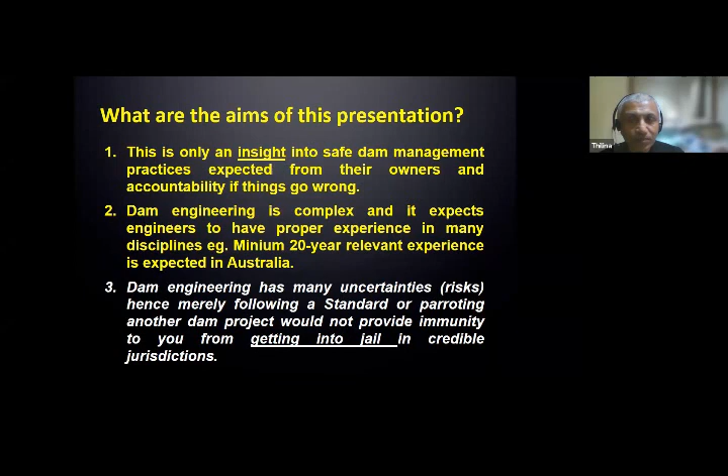Next one, please. Next slide, please. Now, I thought I'll put this one. Of course, for somebody owning a dam, life can be very difficult. So this slide I got from a small... Next one, please. Don't change it. Please go back to the first one. Yeah, please stay. Please stay until I say next. Otherwise, it gets complicated.

So, as he said, no friends after something goes wrong. As you know, trial by the media and also nowadays YouTubers. Even YouTubers asked me to give a voice cut when I was in Sri Lanka. Then independent inquiries: here, we didn't have an incident with any fatalities, but the dam was shown to be deficient, and there was a royal commission and the engineers were prosecuted. And when something goes wrong, insurers always try to find some deficiency in what you promised and how you managed the dam. I'm involved with a lot of insurers and owners. That's what the insurer is looking for, so that they don't have to pay the claim.

Then class action by those affected. In Australia, there are lawyers who do free class actions, saying if I win the case for you, you give me a cut. So if you've got 5,000 people, say $1,000 a person, if they win, that's 5 million. So that's how it works now. And also, everybody will say you should have known better. We are all smart in hindsight.

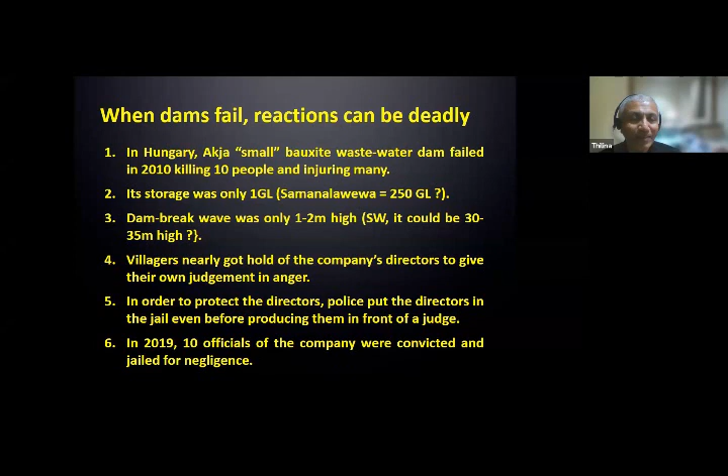As I said, a dam is not a lovely pet - it's an expensive beast, so you need to know what you own. It's like probably owning an elephant - it's expensive, and if it breaks away it can cause a lot of harm. So what I'm going to do is try the legal framework, because here it is very clear who is responsible. There are no ifs and buts.

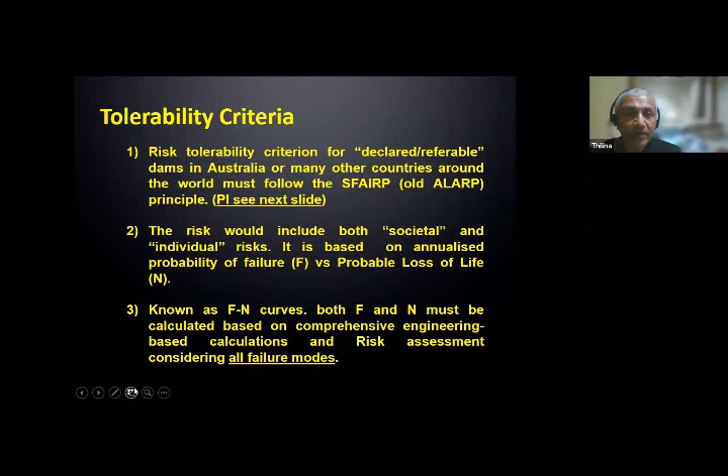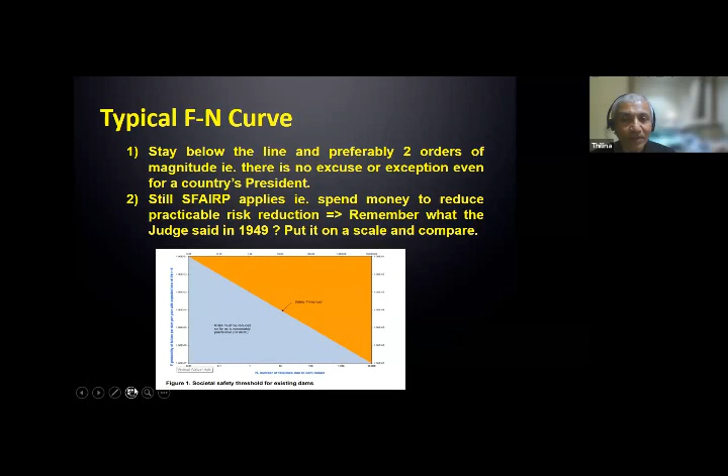So they had to do the numbers - do I save 10 people by spending another 100 million rupees? So I'm just below the line, am I safe? No, you are not safe. It has to be put on the scale and measured. I am not doing it, the judge will do it. Still, SFAIRP applies, you spend money to reduce the risk. Just because you are below the line doesn't mean you are off the hook.

Now I just showed a successful application of ALARP principles here in the inset. Every dam project upgrade, however small the dam is, that has to be done. So Canning Dam upgrade in Western Australia had one of the largest ground anchors in the world, each cable carrying...

2,500 ton load. I did the presentation about this 9 months ago. That's the first in Australia to have a comprehensive risk assessment to justify remedial works, when nearly 100,000 people are exposed should it fail. There's a paper I co-authored in 2001. So what you're looking at on the screen, on your right at the top, is the dam is unsafe above that line. So we did remedial works to come below the line.

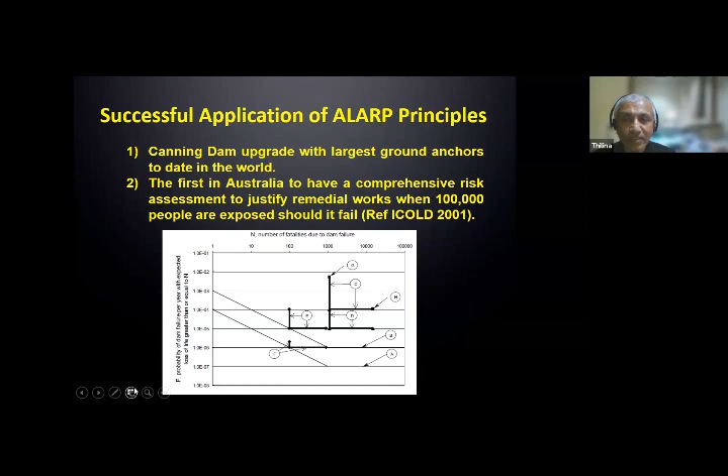And again, this is about 30 years old, this curve has been revised a few times. So it's not that we just put 10 cables based on some sliding factor of safety, which can be done by a fifth grade student from a good school - that's not dam engineering. You need to look at all the failure modes and where your risk profile is.

So any dam needs to have a consequence hazard category. I don't know about the Sri Lankan context, I doubt they have it - maybe somebody told them it's extreme, so they adapted that. In simple terms, a dam is a hazard, so we need to know what are the consequences should it fail. The main criteria is how many people live downstream - not how much hydropower you make, not how much profit margin you make, not whether you're owned by the government or a government utility supported by your friends.

The people who would be affected most are the people living there - people need to live first before they eat. And number two, please don't assume that your dam will not fail because it has a higher factor of safety. Any structure can fail - it's a probability of failure, because in dam engineering there are a lot of unidentified deficiencies. For many dams, we find deficiency in the dam or foundation when it leaks after it is impounded. So to reduce that risk, you have to do more geotech investigation or grouting, and have redundancy.

If it fails, what do we do? That's what many dams have filters for - if the clay core fractures, the filter is going to stop it. There are a lot of dams without filters constructed 100 years ago, still there - probably Giritale and other dams don't have filters. But nowadays you need more risk aversion. That's why any new dam more than 6 meters high is mandatory here to have a filter.

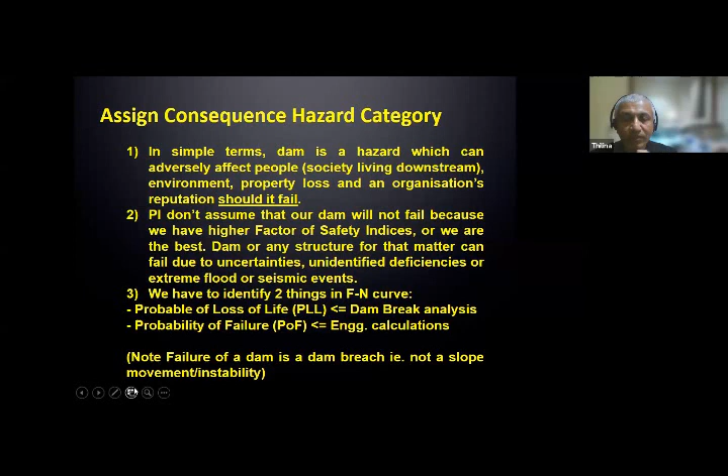Consequence hazard categories. Basically, irrespective of the factor of safety or how thick your concrete, how flat your slopes are, you have to have a consequence assessment. Should it fail?

Then, depending on the determined consequence, in most credible jurisdictions we have categorization from low to extreme. Low means it doesn't have any population at risk should it fail. But there are business and environmental factors too; the main criteria is population at risk or potential loss of life.

As I said, the old rule was a 15 meter high dam is a large dam, high grade. Well, those days are gone now. Even a 6 meter high dam can be an extreme hazard dam, while a 50 meter one is not.

I'm involved with some light rail projects in Sydney. A 6 meter high dam became an extreme hazard dam because should it fail, 94 people could lose their lives. But if you've got a 50 meter high dam in the bush somewhere, probably hardly anybody is affected, it's a farm dam. So it's a low hazard category.

Number four, risk is probability of failure times consequences. If there's a larger population downstream and probability of failure is low, the risk is higher. Other way around: few people downstream but higher probability of failure, it still becomes a high risk dam.

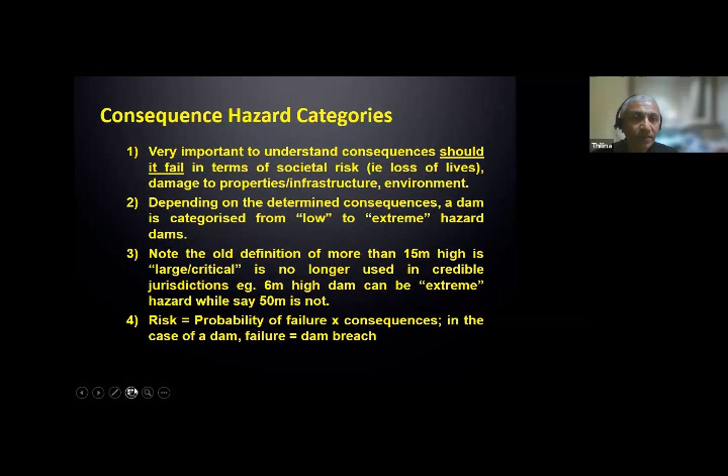ANCOLD was, as I said, first to include this principle, and it's in most of the standards now, and most countries follow that.

Then there are declared dams in the legal framework, as I said before. This means the government would like to know how declared dams are managed, with regular audits undertaken by the regulator. So the owner has to produce reports, and they will be independently audited by the regulator. If the owner doesn't do it, the regulator will do it with government money and pass the bill to the owner. Next one, please.

Consequence hazard. This is how we calculate population at risk. That means all people who would be directly exposed to the flood waters, assuming they took no action to evacuate. They basically stay put, they don't run away. Basically, population at risk of getting wet feet. Should the dam fail, water goes somewhere, and if they get wet feet, they are counted in the population at risk.

The definition of wet feet, or inundated, varies from country to country. In Australia we use 0.3 meters; anything greater than that, people there are counted under PAR. New Zealand uses 0.15, probably they're more scared of water. And the Philippines uses 0.5; when I asked Filipinos, they said we are used to water.

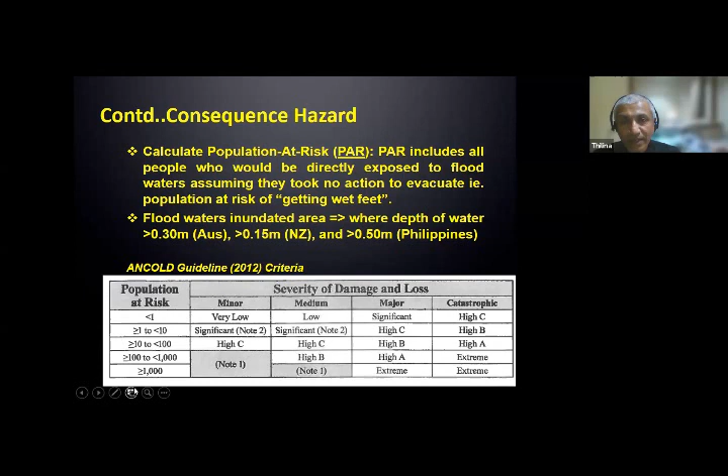Now, as I said, dam break - how do you determine population at risk? You do a dam break analysis, and it has to be done for a sunny day scenario: all sunny, and suddenly the dam breaks. Kantale, as the person who introduced it, said it fails on a sunny day.

So people don't expect it on a rainy day, at least they'll stay inside. On a sunny day, bingo, it goes. And also flood failures - during a flood, you can get overtopping or high water levels can break it.

You can also use screening methods or software such as BOSS DAMBRK, Mike 21, TUFLOW, HECRAS. There's software there to do dam break analysis.

Dam breach dimension - how much, what's the opening on the dam - has to be done by a dam or geotechnical engineer, not somebody in Croatia. I saw some report in Sri Lanka from a Croatian consultant. It's nothing against Croatia, but you have to base it on your own local calculations. If it's silty sand, it erodes within minutes.

DBA gives dam break hydrographs along the valley, and depth, velocity, and the travel time. Travel time is important at night. We don't know until water is probably coming to our doorsteps. And location, and normally, as I said, location with dam break wave travel. If a dam fails, how it comes to your doorstep, greater than 3 hours. They assume people will evacuate themselves, not counted.

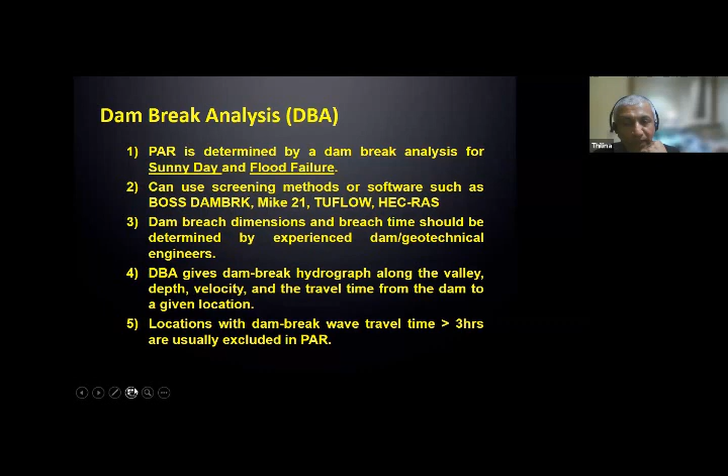Next one, please. Next one.

Now, dam break analysis. As I said, sunny day, SDC. This simulates a sudden breach of a dam in a situation such as a seismic event, internal erosion, known as piping, except Kantale is a piping where suddenly the dam breached through a hole initially formed on downstream, and probably foundation failure due to solution cavities. For example, like Samanalawewa, they all come under sunny day. It doesn't have to rain for that to breach. That's what we call sunny day.

Then flood failure mostly happens with spillways either inadequate hydraulically or structurally, and also the dam will be overtopped. Oroville Dam in USA, I think about 4 years ago, they had to evacuate 300,000 people because the spillway slab lifted off. So those are called flood-induced failure. Now, when it comes to flood, we use incremental, with and without dam break, because without dam break, in natural floods people have already gone to higher ground. So we take the difference.

So this assessment is very complex with many implications to the owner. Low to extreme, high A to extreme. For extreme, the hydrograph is the probable maximum flood, nothing higher than probable maximum flood. If it is high B in that table, probably, I think, a 100,000-year flood. If it is low, they don't care about the flood. It can get washed away if they want, daily or weekly.

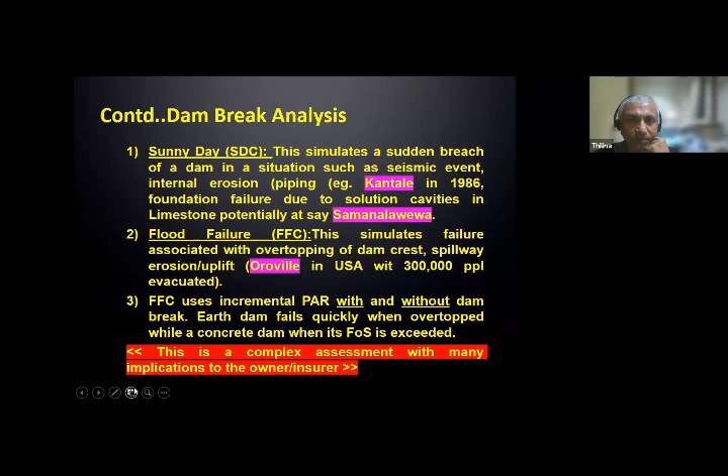Okay. Now I put this just for a project I was involved in, in the Philippines, 110 meters high, near Manila. It's an embankment dam with a height of, I think, 90 meters, and a storage capacity of 150 gigaliters. It's reasonably big. Many lives would be exposed, I didn't say lost, exposed when it fails, probably inundating suburbs around Greater Metro Manila. The failure scenario shown in the next few slides is piping. Sunny day, it fails. And the breach dimensions, which we calculated, are 65 meters wide at the bottom with a 1:1 slope going up. So it's a big opening.

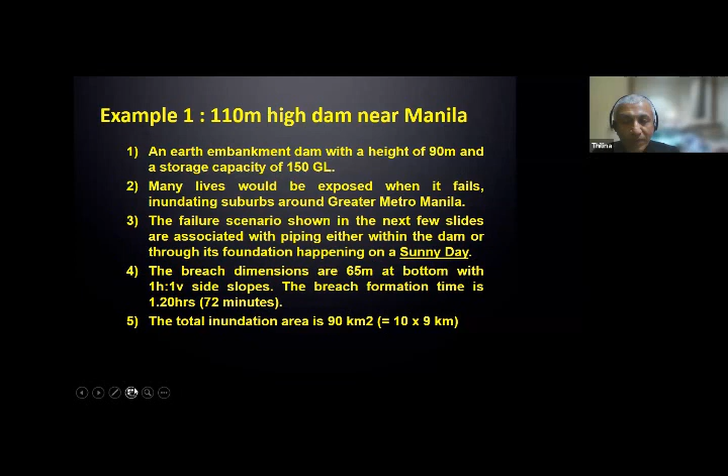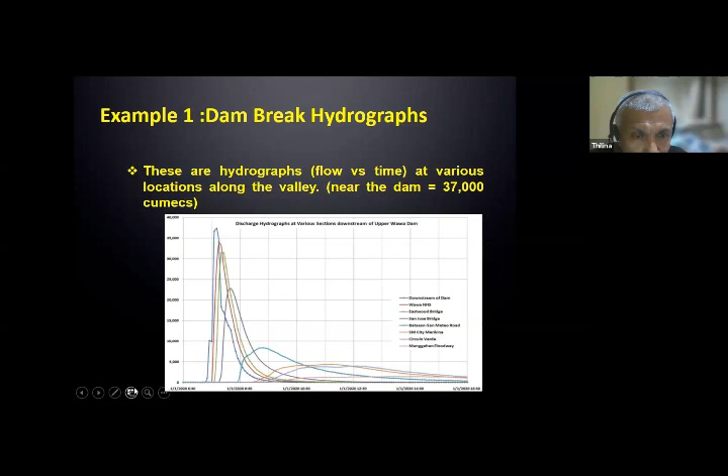Next one, please. I just want to show the consequence. Now this is a hydrograph, flow versus time at different locations. You can see close to the dam, I think this is about 1 kilometer downstream of the dam, the peak flow is 30,000 cumecs, 37,000 cumecs, which is huge. I think the inflow is 1,000 cumecs. This one going out is 30,000 cumecs. So 30,000 is huge. As it travels down, the peak reduces, but the duration increases, because all the water in the dam has to go through the floodplain until it enters the sea or the river.

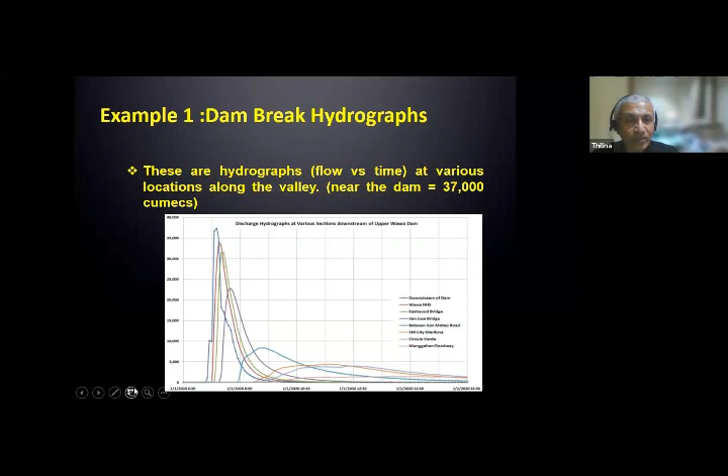Next one, please. This is in the Philippines, not in Western countries or anything. So the Philippines probably do better than us, a country that was not doing worse than us 50 years ago. So they are catching up. Probably Sri Lanka is falling behind.

Dam break inundation. This is a shot I just got from the report. So maximum depth is approximately 30 meters. 30 meters is about, I think, a 12-story building.

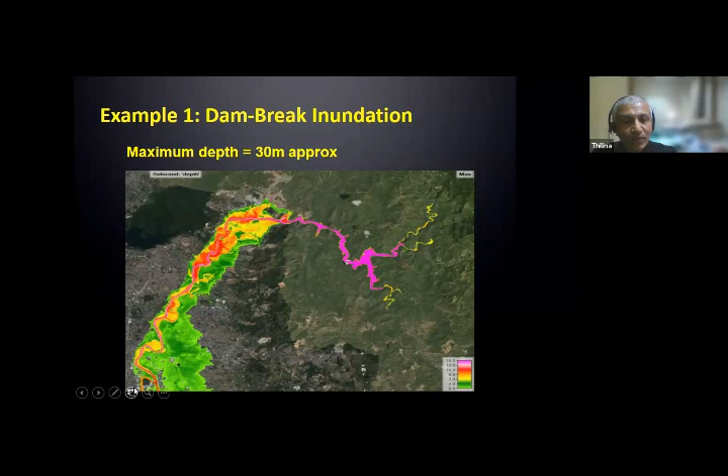Next one, please. Next slide.

Next one, please. Next one. Next slide.

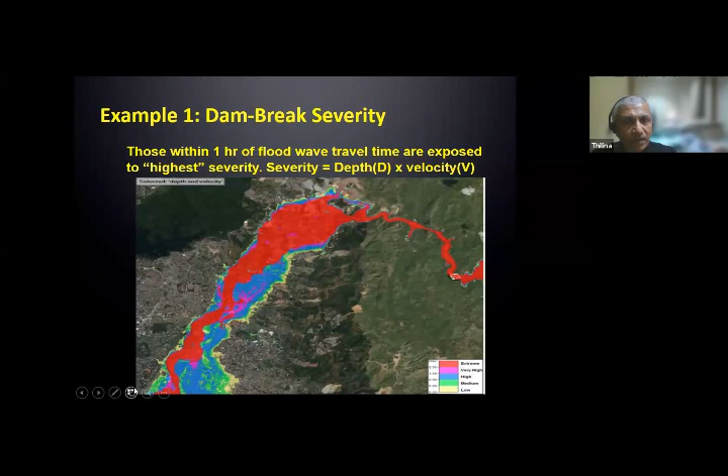Now, once we do the population at risk, that means they took no action to evacuate themselves. We know, say, 30,000 people on the floodplain. Then we had to look how many lives can be lost, because some people can run away, some people climb onto the trees. So it's human behavior. There are few methods in the world. Most popular, Graham 1999, is coming from the United States Bureau of Reclamation. That's what is used in most credible jurisdictions to estimate population at risk to probable loss of life.

As you can see, bottom one, DV greater than 15. That slide I showed, fatality rate is 0.75. So 100 people are in the PAR, 75 will die. So that's how probable loss of life is calculated. That is needed for the ALARP principles. So in each zone, probable loss of life is fatality rate times the PAR, and then sum them all up to get the N value on the risk basis. So if it fails on a sunny day, probable loss of life is 900 people. Next one, please.

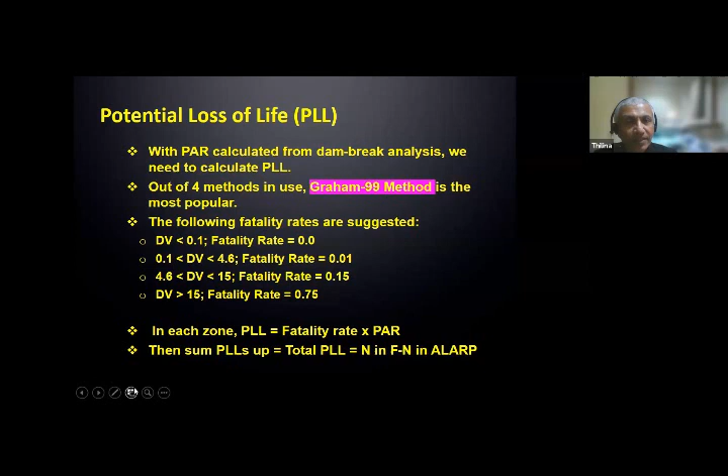Rather than the Graham method, which is complicated — I don't do those things, I get people to do it — there is DeKay, who proposed a very simple formula. This can be used at a screening level, go by helicopter or something, see how many people are living in the valley; this gives a quick way to calculate the probable loss of life. It clearly shows the warning time has a big impact on the reduction in the probable loss of life. Next one, please.

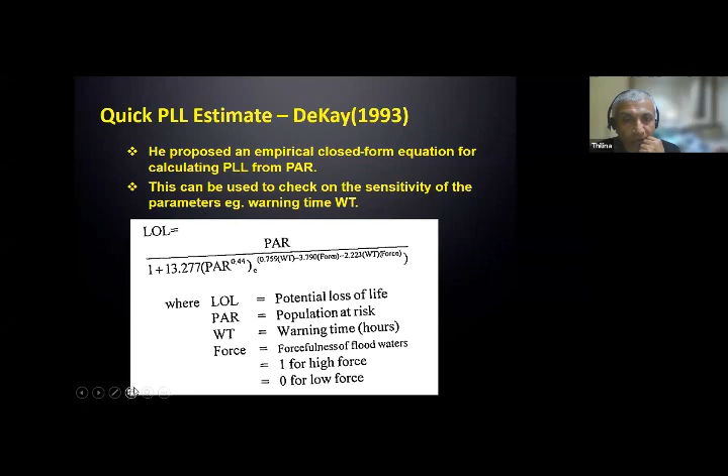Okay, I'll just give an example of how to calculate the results. This is, I think, a 43 meter high dam I reviewed about 3 years ago. Sunny day, we got population at risk — it's in the less populated part of New Zealand — population at risk 337, probable loss of life 117. 30% of the people would die. Flood failure, population at risk is 455, but PLL is 71 because there is some warning time, only 12%. So the higher fatality percentage is always on a sunny day. So it's wrong to say it's going to fail on rainy days.

Most likely improperly managed dams, no dam safety review, no inundation mapping, owners business oriented, they would fail in piping. Worldwide, of dams which fail within 5 years, 90% fail due to piping. So a deficiency shows up immediately or during filling. So that's critical. That's a typical case, with most of the dams having foundation or abutment or dam deficiencies. Next one, please.

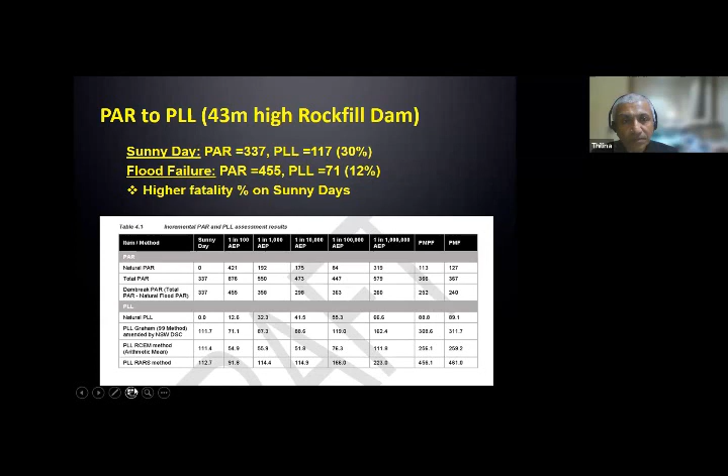So this one, dam safety risk engineering studies. I won't go into detail on that one because each one will take at least a week. Failure mode analysis and risk assessment, just to give you the process, so the audience can realize how things are and where they are. Next one.

Comprehensive dam safety report. That is mandatory here, every 10 to 15 years or after a major event. When I say here, don't say he's telling from Australia what to do. Many countries around the Asian region, India, have now got the system developed in the last 5 years. That's how it is, because standards change, dam behavior changes, there's better data on hydrology and seismic. So that has to be done in 10 to 15 years. Now, in most of the states here it is mandated.

There's no excuse. DSR is basically redoing all the design calculations. You don't take the original design report, photocopy it or PDF it, write a one page cover, say it looks okay, get the money and disappear. As a consultant, you have to do all the calcs. It's comprehensive. And here, if it is greater than significant hazard category, the regulator will appoint a 3-member independent review panel. They are independent. They are not friends or buddies of the consultant.

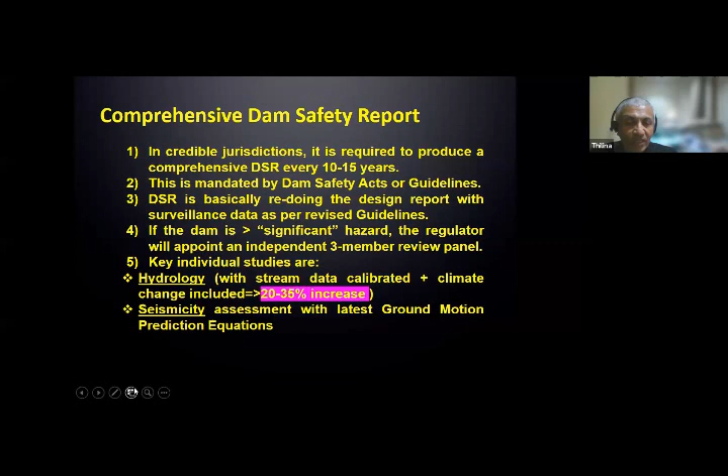And key individual studies are hydrology. Now they say — I didn't put the reference — 20 to 35% increase in the peak and the volume of the input hydrograph due to climate. Say if you are designing a dam for a 100-year design life, climate would change in 100 years. Some people say climate change is a myth, but there is science behind it. Seismicity: the earth doesn't know when you are going to do the dam safety review, but better data is available from earthquakes that occurred since the dam was built, as well as better ground motion prediction equations. Next one, please.

DSR cover, I just want to show what it covers. As a minimum, dam inspection report by experts. Again, when I said experts, not your buddies. Foundation geology is very important. As I said, after building a dam, only then do you know your hydrogeology. So you have to get all that into one document or one model.

There are better three-dimensional geology models called Leapfrog. You put boreholes, it does the layering itself. All the geotechnical parameters, because the testing methods have changed, so you have to redo. Hydrology and reservoir routing, spillway hydraulics, static and dynamic slope stability, dams and abutments, M&E, mechanical, electrical.

If you've got gated structures, that's very critical. If gates don't work, the dam is going to overtop. Structural assessment of all elements. Internal erosion, I highlighted. You've got piping. People think piping is, they use Lane's formula. Lane's formula was discredited a long time ago. And then recommendations for investigation and remedial works.

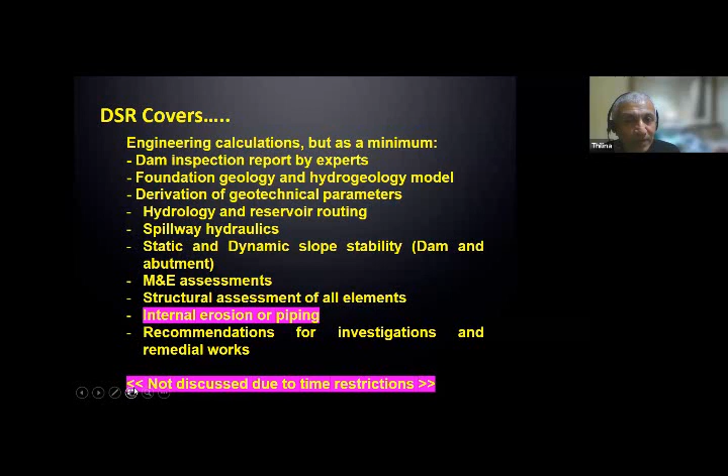I will not be discussing these. These are particular subjects, but I just want to show what the DSR should cover. Next one, please. Then failure modes. A dam can fail in different modes: slope stability, piping, gate failures. So it has to cover all the failure modes.

So traditional deterministic calculations are not enough on their own in risk assessment. You need probabilistic assessment based on the engineering calculation. So if you calculate a factor of safety of 1.5, it's a good feeling. It's got a low probability of failure, probably 10 to the -4. I'll show you an example later of why I said risk needs to be considered.

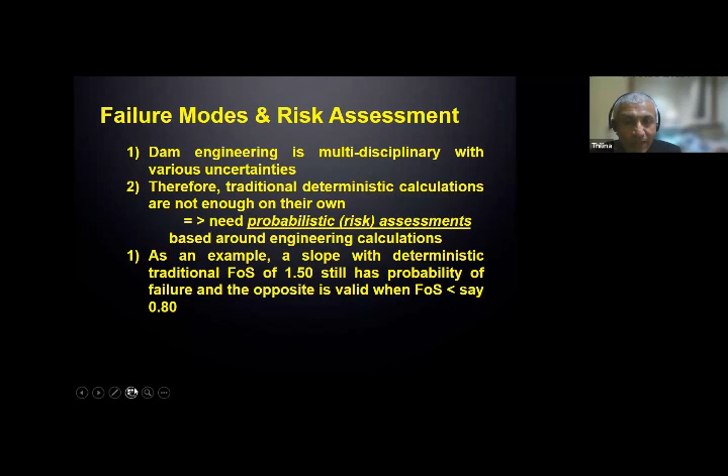These things are not being taught at unis because they all do angle of friction, calculate factor of safety 1.5. If they do that, they get A double plus in the uni exam. But still, with a factor of safety of 1.5, there's a chance that the slope can fail. Of course, a low chance. On the opposite, if the factor of safety is less than 1, say 0.8, it may not even fail. That is because of uncertainty in the parameters and the hydrogeology. That's why dam engineering is now moving more towards doing the calculation and then doing the risk.

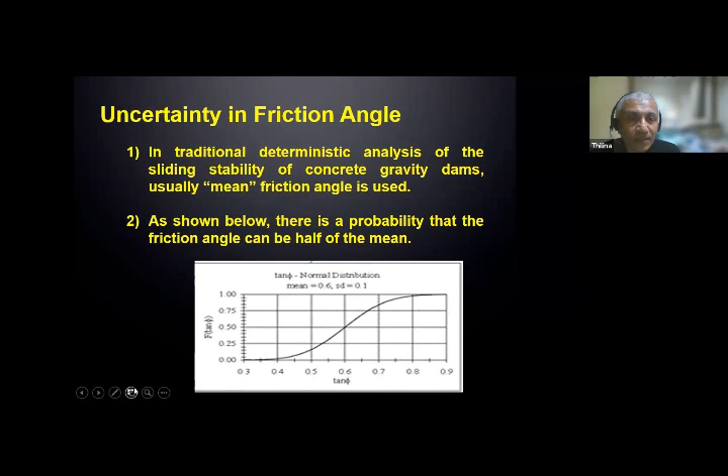Next one. Yeah, this one I said. Then overall failure modes. You've got a dam, no point in saying, oh, angle of friction uncertainty. You need to look at the full spectrum. That's what risk-based is. Now here it shows in a gravity dam the difference between the applied and the resisting force, that's the shear strength at the bottom. When the difference is negative, the dam is failing.

Now this thing I did long ago, about 1991, I think. We had gate reliability, the flood uncertainty, seismic, geotech, all that, put it into one formula or package and did Monte Carlo simulation. Monte Carlo is a mathematical model. Even banks do their share market analysis based on Monte Carlo. It does millions of scenarios and gives this curve. This curve shows the dam has a probability of failure of 0.0008, or 0.08%. So although it's got a good calculated factor of safety, it still has a probability of failure. Next one, please.

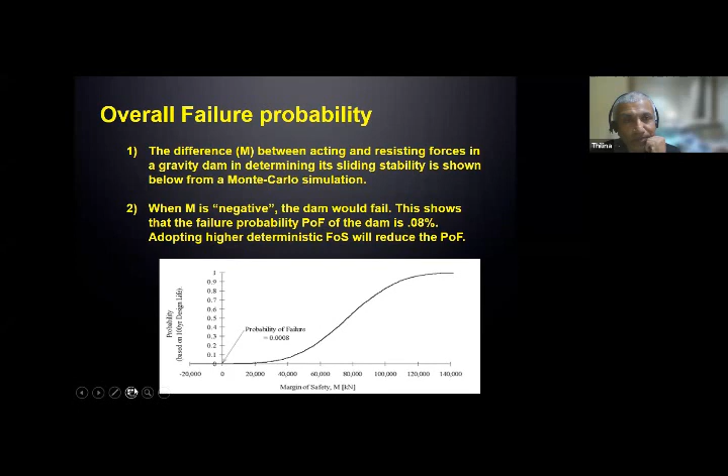List of failure modes in the dam. I just put a few you need to consider. It's not only a sinkhole or something that exists in dams. Dam overtopping, you need to look at your hydrology. Then dam and abutment stability. Abutments are most probably the ones, because people forget about the abutment. They get carried away with the deeper section, which is the dam.

Filter compatibility and crest designs. Filter compatibility is basically piping through the dam and foundation. All of these are potential failure modes. If they are not very dominant, they have to be considered, but then discounted by experts, a panel of experts, not one person saying that's how they did it in Pakistan or Croatia.

So as I said, double asterisk, piping receives attention in most of the existing dams throughout the world. And probably, as I said, you have one with solution cavities. It's a piping issue, I believe. Next one, please.

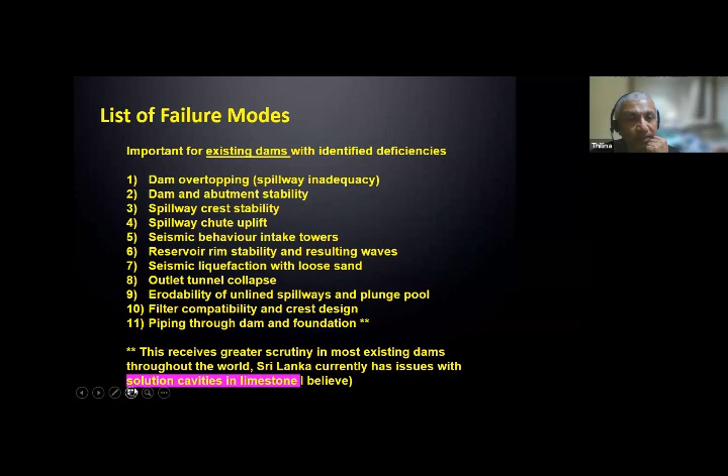As I said, one: reassess geotech. In this one, Churchman Brook Dam in Western Australia, built in 1927 with a major upgrade in 2000. We took all the geotech, plotted them on this P-Q plot and did everything. This has old results, new results, everything to get this design proper. Not some university professor saying the angle of friction is 33. That's not dam safety engineering.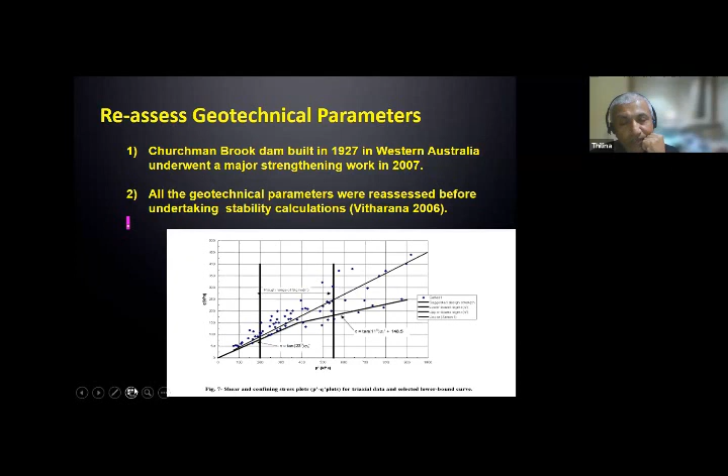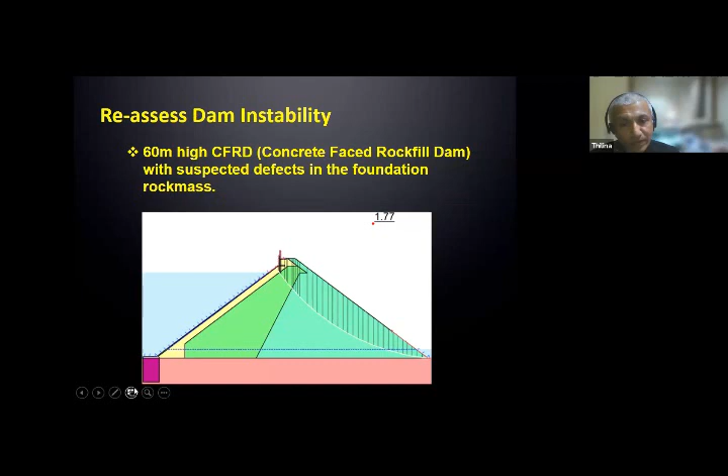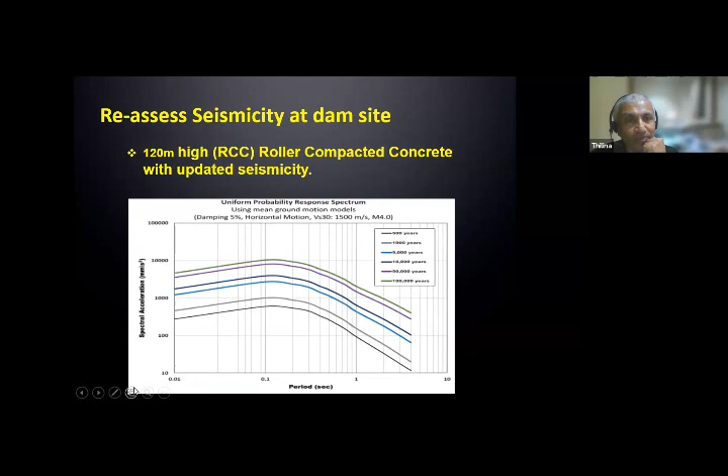So piping needs five scenarios. One is the initiation event, like an earthquake or higher water level or known defect. Then continuation, it results in a cavity or piping. Then progression, from downstream to upstream. So it starts downstream, coming upstream. And that's probably what happened with the clay fill dam on Samanalawewa, where the Japanese underpinned downstream after some time. Then progression, then intervention.

Can we intervene? It happens, but most unlikely. How do you intervene? You can't put the finger and close it. I think a boy in the Netherlands some years back put his finger in and stopped the piping from progressing. And then breach. So all that has to be considered to determine the risk of failure. From initiation event to the breach, it's a complex calculation or determination involving experts. Next one, please.

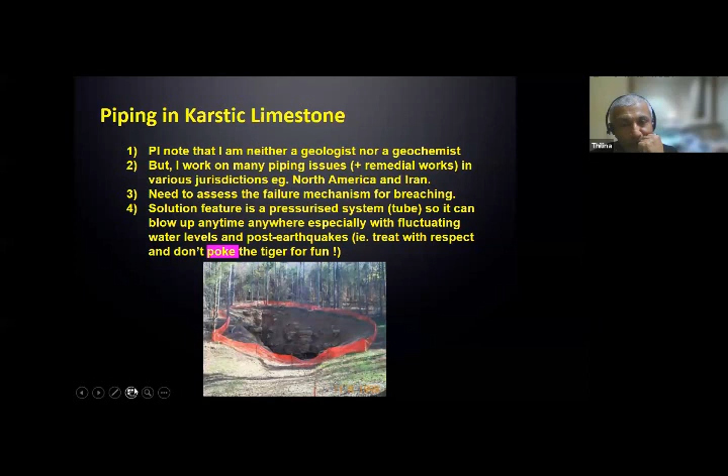And especially with fluctuating water tables, they are very sensitive in karstic limestone to changing water level, oxygen and water. And again, post-earthquake, something is weaker. The earthquake doesn't need to be big. A smaller one will trigger it. So as I said, treat it with respect and don't poke the tiger for fun. Those are pressurized systems. This I got from a project I worked on a few years back in North America. It shows a sinkhole in karstic limestone. Next one.

Typical piping assessment, as I said, those five; this is the inventory. Initiation, all these things had to be done to get the final failure mode. Key input: engineering assessment. We can't just look on the internet and say the failure probability is 0.5, 0.3. We need to benchmark our brain with calculations. We need to know a factor of safety of 1.5, and from our experience the failure probability will be 0.001. That's how the inventory works. As I said, it should be done by the opinion of experienced people, not by Googling. Next one, please.

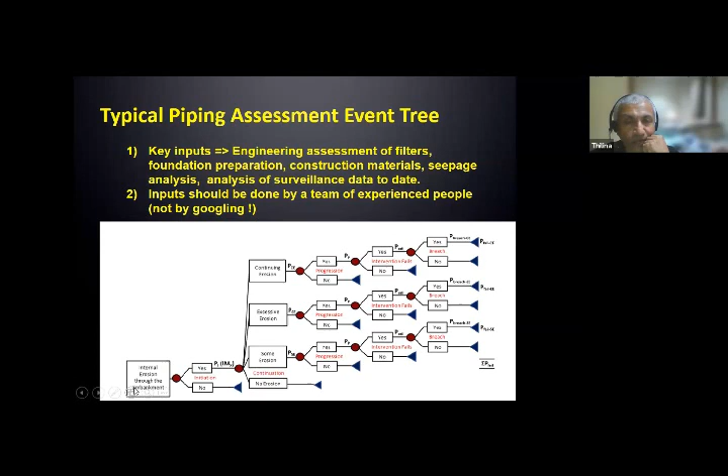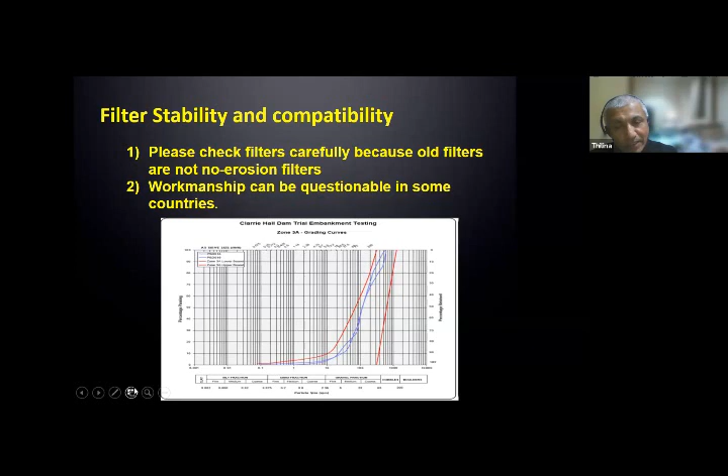Filter stability. Again, filters are very, very serious. The filter is the one ultimately going to stop piping happening in any dam. So you need to look at all filters. Sometimes with workmanship, people take money and put the wrong sand, or some sand breaks down and some sand gets cemented. Cemented sand is not a filter. When the soil shears off, the sand should follow. If it is cemented, it doesn't, so it allows the piping to happen. So people have to get the old reports, construction reports, plot them, take samples and test them. That's part of the dam safety report. Next one, please.

Estimation of conditional and total failure probability. That's the... it's still, yeah. Let's put the next one, please.

I just want to give the complete picture. What are they? Conditional probabilities given initiating event. What is the failure probability? For example, water level in the storage went up 5 meters. What is the failure probability of the slope now? It's called fragility curves. That's a key input to the risk.

Then initiating events, usually reservoir water level and the seismic acceleration, so PGA, what you call peak ground acceleration. These are annual exceedance probability. And this is usually known as system response. They are to be partitioned; I will show you why it is. Then failure probability: system response, that's initiating event probability, say 1 in 10,000 year flood, multiplied by the conditional failure probability. Next one, please.

Yeah. So this one, there are simple ways to do that too, where some people get scared when they look at event trees, and some people get attracted because they know they can do a lot of black magic. In dam safety assessment, usually event tree type simulations is the norm, acceptable in other countries as well, North American. Traditionally, calculated factor of safety can be directly converted to failure probability without doing sophisticated simulation like Monte Carlo.

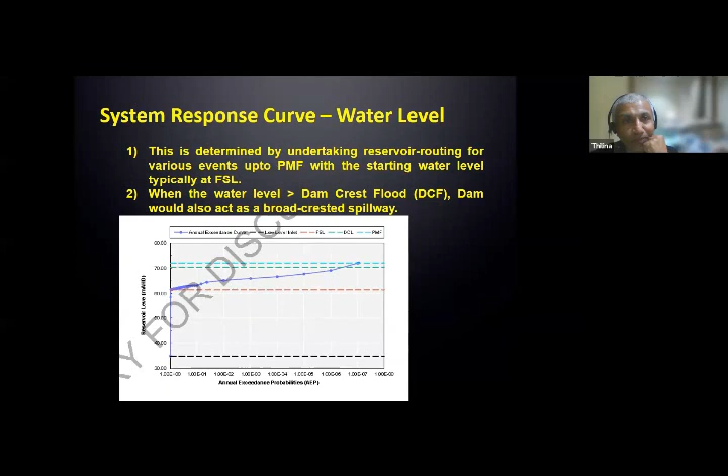Yeah, system response curve. Hydrologists would know. You do reservoir routing, water at full supply, and the water level versus annual exceedance probability. Next one, please. Similar with peak ground acceleration given by a seismologist, peak ground acceleration and annual exceedance probability, normally known as probabilistic seismic hazard assessment. Next one, please.

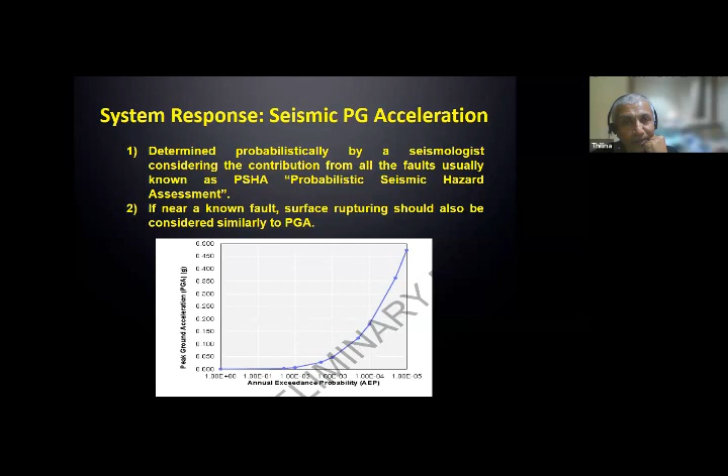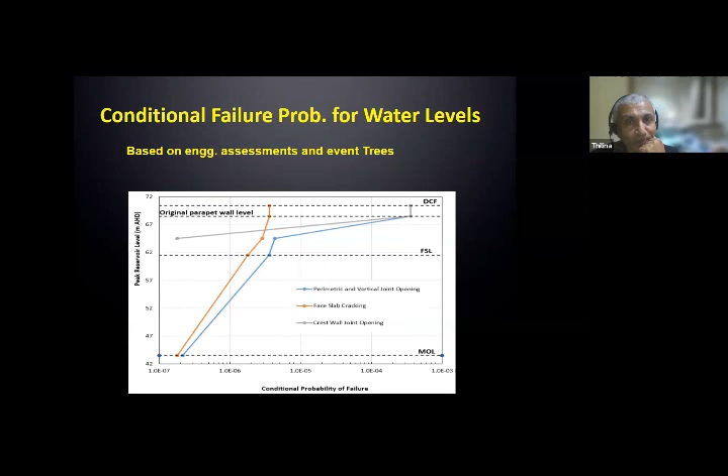Conditional failure. Again, as I said, given event, what's the failure probability? The complex event trees come to this thing. So given water level, that's the probability of failure. Next one, please. Okay, similar for earthquake, given acceleration, that's the probability of failure. Next one.

So total probability is the product of this one. This pie chart shows different failure modes. What's the percentage? In this case, the blue one, dam overtopping, is carrying the highest risk. So if you've got money, that's what you need to hit first. Next one, please.

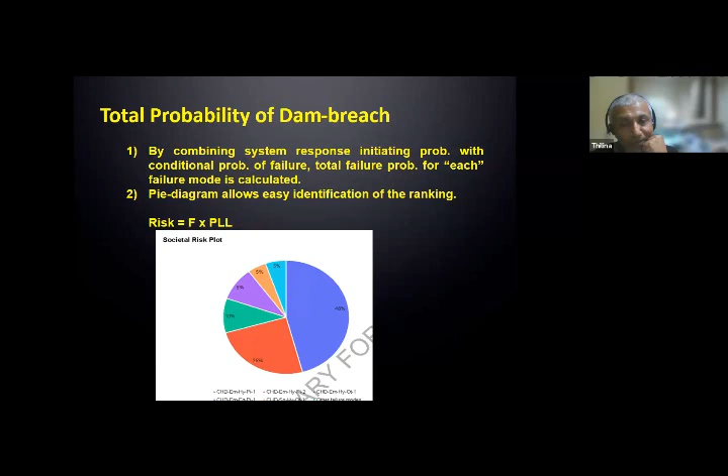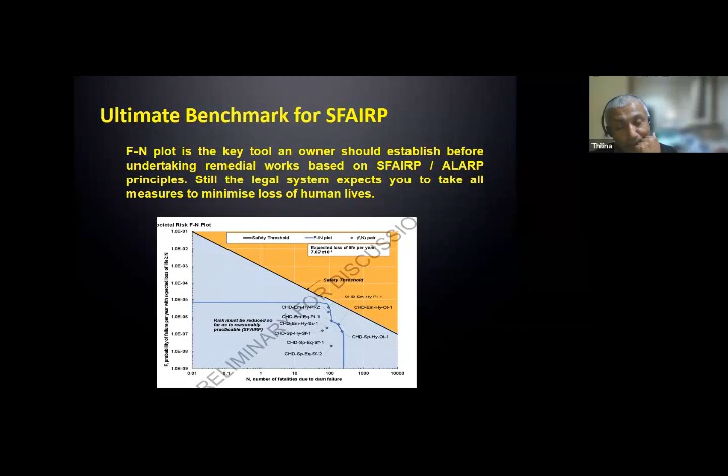Okay, all these things end up in this curve. So you can see all the failure modes stay below the line of separation, but still in the ALARP region, so owner, you need to spend some and see whether you can bring them lower on that scale. Next one, please. Okay, next one.

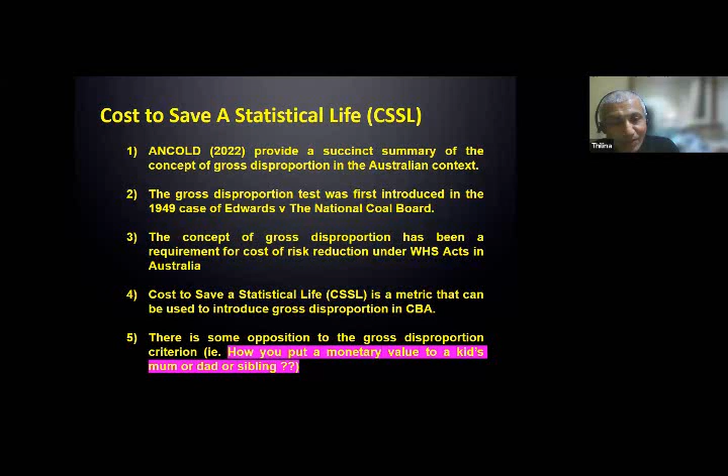Yeah, this is the thing. When you spend money, there's a rule called the gross disproportion test. That means how much money you spend to save a statistical life. So the dilemma is, how do you put a monetary value to a kid's father, mom, dad, or sibling? You know, your father was $400,000, or 10,000 rupees. Next one, please.

Calculation of, you have to calculate here, for most standards now, cost to save a statistical life. That's the formula. It's got all the economics and the failure probability, reduction in the risk, all that. We can calculate how much money I have to spend on this project to save a life. Next one, please.

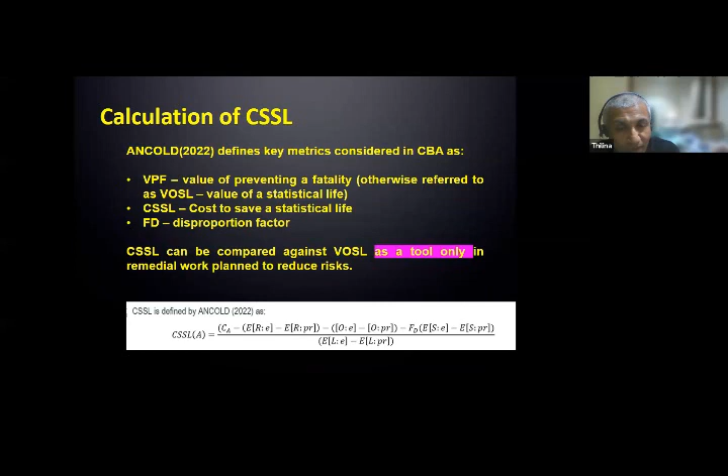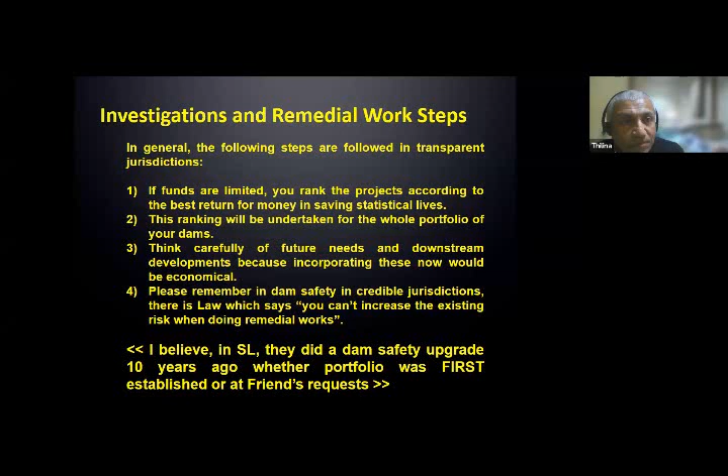Be careful with knee-jerk remedial work. As I said, you can't just take one solution and put it everywhere, like a toe drain. It works for some dams, it doesn't work for other dams. And then grouting, if you grout the foundation, probably you may end up grouting the filters on the dam. That's the last thing you want to do.

Sometime 10 years ago, it happened on a dam here. Grouting, not knowing the foundation hydrology, if you plug a water path somewhere, it gets pressurized. That's what you have to be very careful about.

Grouting, karstic limestone, permanent lowering of the water level - we think we reduce the risk, but you have to be very careful. When you lower the water level, you are drying the crest, so there's desiccation and cracking. At higher water level, it can cause piping.

That's why we now put filters around the dam, right to the top. Nowadays it's only up to the full supply level. Most of the dams pipe under floods when the water level is above that line. So one option is either live with the devil or decommission. Next one, please.

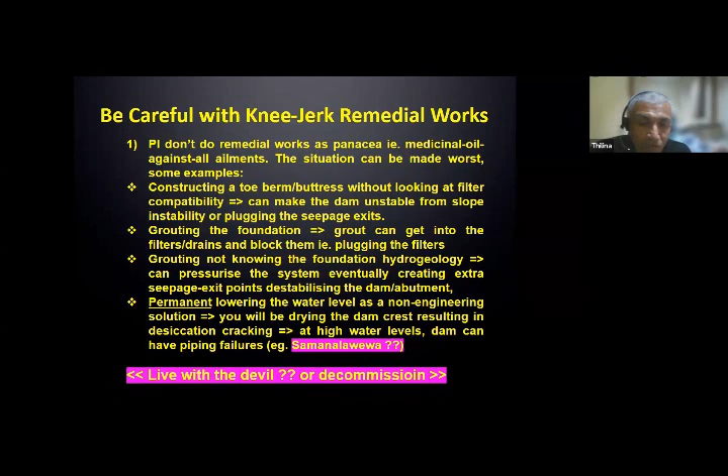Okay, last one. Badra would be happy. So decision on remedial works to an existing dam is complex.

ALARP, as low as reasonably practicable principles, would dictate under common law - you don't have to have a Dam Safety Act. Accountability for a natural disaster always lies with the president, he runs the country. Professionals can be charged under criminal offenses for lack of duty of care. Any remedial works should be risk-based with thorough engineering assessment. Existing risk profile cannot be compromised by improper remedial works undertaken without thorough study. So if you compromise the existing risk during remedial works or after, you need to answer to somebody.

Anyway, thanks guys, just too tired. Thanks, Badra, that's all.

Thank you, Thilina. Sorry for pressurizing you for going past the track. Actually, I feel a bit guilty about that, but of course. Yeah, let's go. Anyway, your keyword is risk reduction.

So really, this is an eye opener to most of the audience here. Thank you very much for elaborating the legal implications during the first part of your presentation. You clearly explained what legal background dam engineers have to face in other countries, especially regarding negligence of duties and things like that.